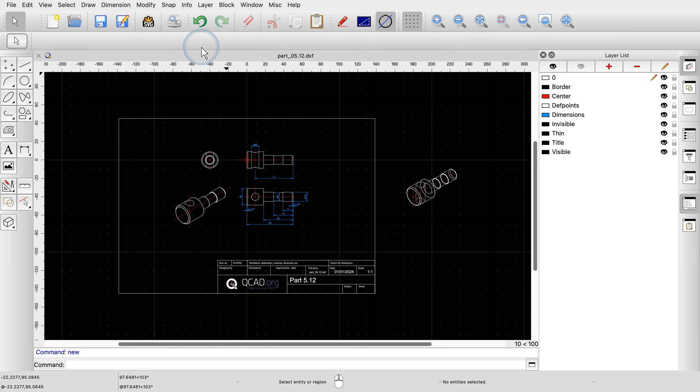To prepare our drawing for printing, we first switch to the print preview. We can immediately see that this drawing has not yet been set up for printing. The page orientation is set to portrait instead of landscape, and the drawing is not entirely on the page.

Before we attempt to adjust the drawing scale and position, we make sure that the page is set up as desired. The white rectangle represents the paper we are printing on. The blue borders on the paper indicate the intended margins between the paper border and the drawing. We can check and adjust these preferences in the page settings for our drawing.

To access the page settings, we either click the button in the Options toolbar or we open the drawing preferences from the Edit menu. The page settings allow us to set the paper size, the page orientation, and the margins. For this drawing, we change the page orientation to landscape.

The paper size is currently set to A4. If we are printing to a printer that uses a different paper format, we can adjust the paper size here.

The page margins are set to 10 mm, which will work fine for this drawing. Note that in older versions of QCAD, the margins are accessible under the Multi-Pages Preference category instead of the Page category.

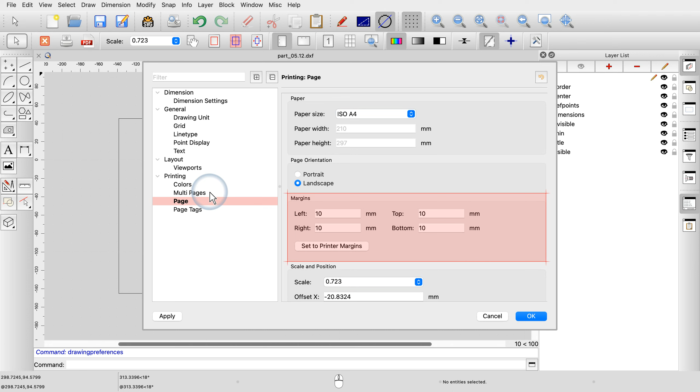We can now use the Auto Fit button to automatically fit the drawing on our page. Auto Fit adjusts the drawing scale and position so that all entities fit on the page with the margins we have defined in the page settings.

Note that we did not scale or move the entities of our drawing in any way. Our drawing still has the same size, and none of the measurements or coordinates of the drawing have changed. All we did is to tell QCAD how we want to scale and position the drawing on the paper for printing.

AutoFit is sufficient when we simply want to print the whole drawing and don't worry about its scale on the printout at all. For this example, however, we want to print the drawing to scale.

We want to print the drawing border and everything inside of it. We do not want to print the part that is located at the right, just outside of our drawing border.

To print a drawing to a given scale, we change the drawing scale in the Options toolbar. We can enter a scale factor of 1 to print our drawing in its real size. Alternatively, we can enter the drawing scale in the format 1:1, meaning that 1 unit on paper corresponds to 1 unit in the model.

Next, we use the tool to move the paper position. We can now move the paper using drag and drop. Our drawing is now ready for printing.

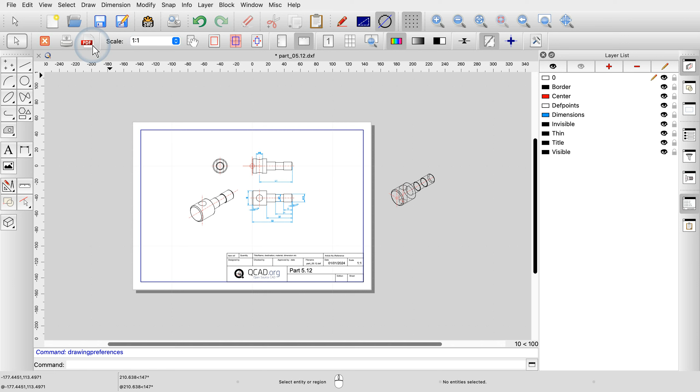Not all drawings fit so conveniently on a paper like this example drawing. A drawing might, for example, be too large to be printed in real size. We can demonstrate this using the park layout plan previously featured in the tutorial about blocks.

This drawing, like most CAD drawings, has been created in real size. The unit of this drawing is set to meters, so a distance of 1 unit equals 1 meter in the real world.

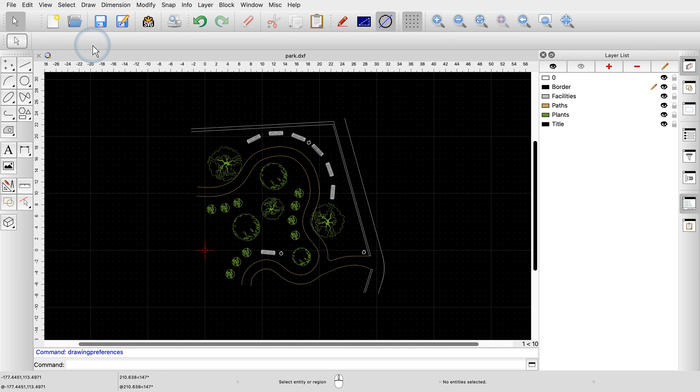When we switch to the print preview, we can barely see the A4 paper as a tiny white dot near the drawing origin. To fit the whole plan on a single page, it needs to be displayed at a smaller scale for printing. For this example, we set the scale to 1 to 250.

In other words, we print the plan 250 times smaller than it is in the real world. 1 centimeter on the paper will correspond to 250 centimeters, or 2.5 meters in the real world.

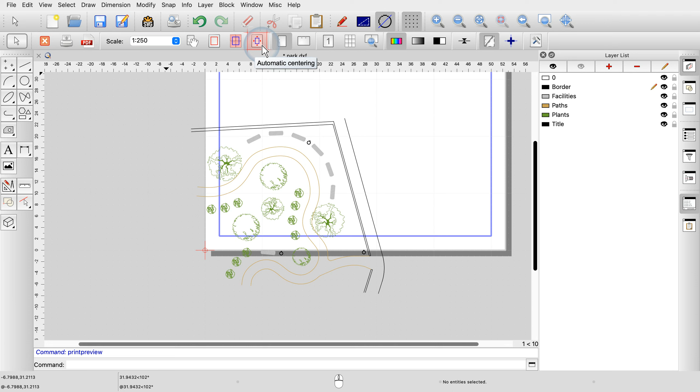To adjust the drawing position, we use the tool to automatically center the drawing on the page. The plan is now centered on the page and scaled as desired.

However, we also want to insert a border for this drawing. We have already prepared a drawing border in a separate block called Border. The border was constructed in paper measurements and is a bit smaller than an A4 paper.

When we insert the border block, it is at first so much smaller than the plan that we cannot see it at all. We need to scale the border up to fit our plan scale.

Since we have scaled our plan down by a factor of 250, we need to scale the border up by the same factor. We can now place the border on the paper as desired.

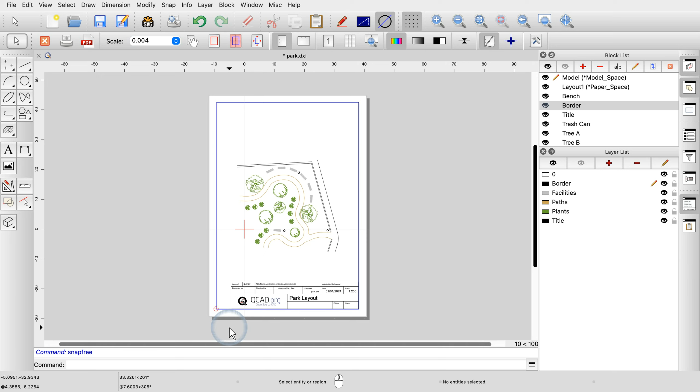As author of a drawing, we need to be aware from the start at what scale we want to print the drawing. Not only the scale of the border, but also the size of dimensions or text labels depend on the final drawing scale used for printing.

We can now print or export our drawing.

You should now be able to print a drawing using AutoFit or print a drawing to scale using the print preview. Be sure to practice this with your own installation.